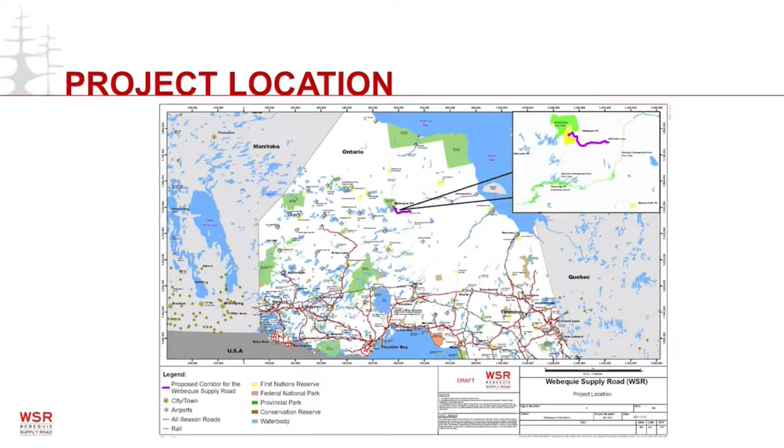In terms of the purposes for the Webequie Supply Road, I'll just go through them here. The first is to move materials, supplies, and people from the Webequie Airport to the McFaulds Lake area, which sits within the Ring of Fire mineral deposit area.

The second purpose for the Webequie Supply Road is to provide employment and economic development opportunities to Webequie community members while allowing them to both preserve and enhance their language and culture. And then finally, to provide experience and training opportunities for youth, to help encourage the pursuit of additional skills through post-secondary or post-high school education.

Let's now talk a little bit about the project itself. And as I always say, it's more than just a two-lane gravel road.

The planned road is approximately 107 kilometers in length. It would extend from, as I mentioned, Webequie Airport southeast to the McFaulds Lake area in the Ring of Fire mineral deposit area. Of those 107 kilometers that the road would travel, 17 sit within the Webequie First Nation reserve lands.

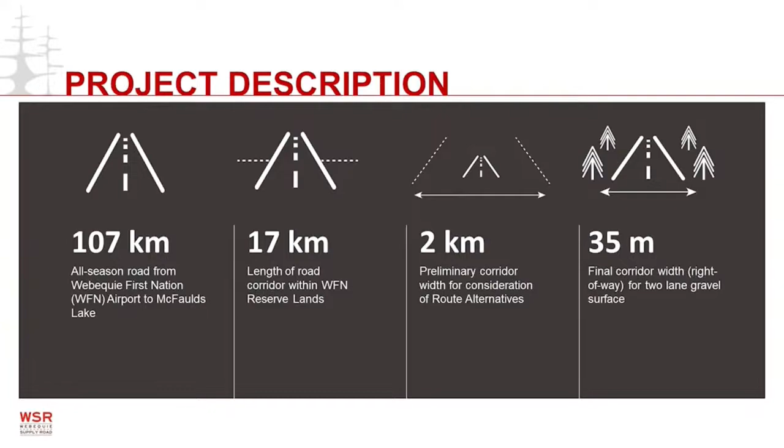That would be the right of way, the cleared area, and the road itself would be a two-lane gravel surface road.

Continuing with the project description, there are three major water body crossings. When I talk about water bodies, I talk about lakes or rivers or streams. There are many other water body crossings, 23 actually, but the three major ones require bridges. The other ones would require different types of culverts.

Again, as I mentioned, it's more than just a two-lane gravel road. The project would include both temporary and permanent aggregate pit and rock quarry areas, that would have equipment for processing or crushing the rock into various sizes depending on the purposes for construction.

And then, of course, there would need to be access roads to get to these pit and rock quarry areas, and these access roads would have water crossings included with them as well. So there is a lot of infrastructure beyond just the two-lane gravel road.

In terms of construction camps, these would be temporary, and the purpose is to accommodate construction crews and also perhaps provide permanent locations for operations and maintenance yards. And of course, these kinds of facilities would have supportive facilities such as wastewater treatment plants and drinking water storage areas as well too.

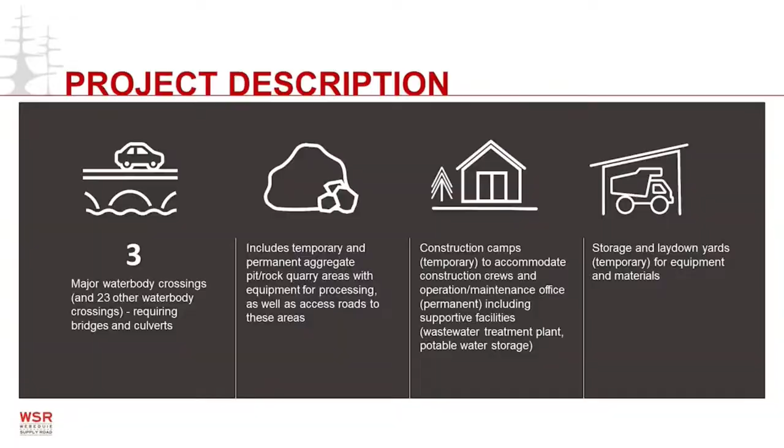And then finally, these construction camps, or the project, would include what we call temporary storage and laydown yards for equipment and materials. Typically these are, as I'll get into a little bit later on, part of the construction camps, because the workers are there and they can get their equipment and materials needed for the day without having to travel too far.

So as we move along, we're going to review the alternatives assessment process. For every undertaking or project, a reasonable range of alternatives must be considered during an environmental assessment. These alternatives include alternatives to and alternative methods.

Alternatives to the proposed undertaking are functionally different ways of approaching and dealing with a problem or opportunity. Alternative methods of carrying out the proposed undertaking are different ways of doing the same activity. Let's look at some examples to help explain this further.

When we talk about alternatives to a proposed undertaking, again, these are functionally different ways of approaching and dealing with a problem or opportunity. In the case of an all-season road, you could have different modes of transport proposed, such as a cargo hovercraft, cargo airship, or railway. You could also upgrade an existing trail system along this route to a seasonal winter road and use that to help move goods.

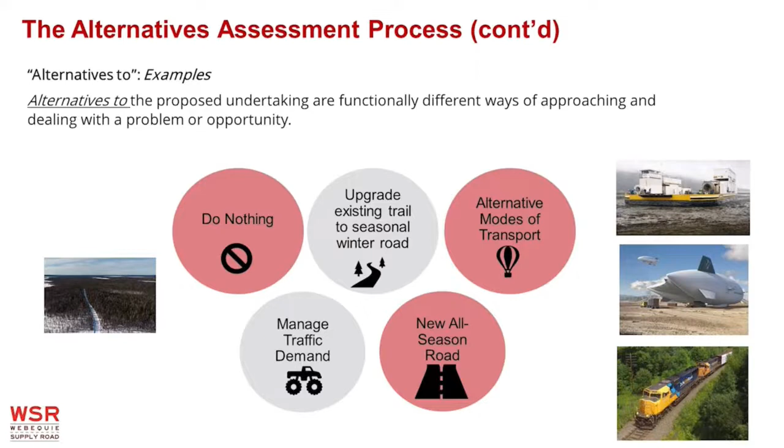Now let's talk a little bit about alternative methods. These are different ways of doing the same activity. When we're talking about an all-season road, these could be different routes. Remember, I talked earlier about a preliminary corridor having been identified that's 2 kilometers wide. Having that sort of planning area allows us to move the position of the road to adjust the route to avoid any constraints that we may not know about right now and that may be brought up as the process continues.

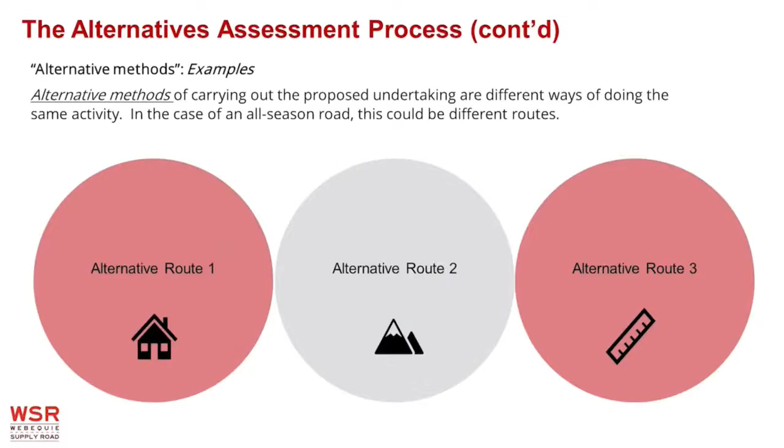So now let's get into construction camps. A construction camp may include accommodations like a bunkhouse for workers, construction offices, kitchen and dining hall, first aid station, communication system, wastewater treatment system, groundwater supply wells, waste handling and storage facility areas, electricity supply from diesel generators to provide electricity to the camp itself, above ground fuel storage tanks and refueling areas, and lay down storage areas for equipment and materials, as I mentioned earlier.

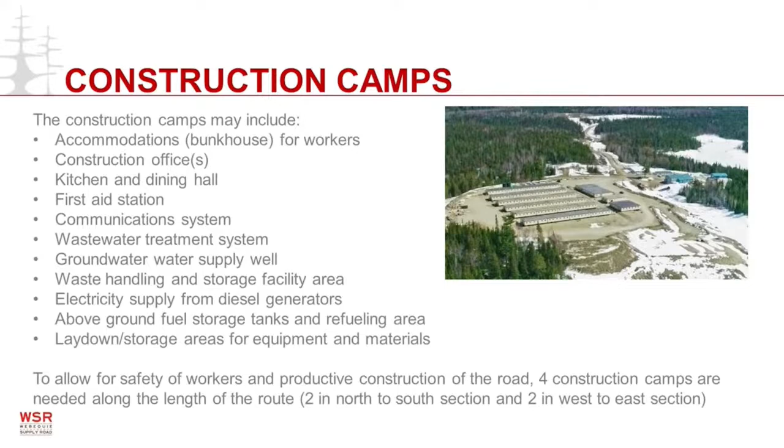So there's a lot to these camps—a lot of different infrastructure components associated with them. I wanted to also mention that there will not just be one construction camp along this route. In fact, the construction planners have identified four camps being required to allow for worker safety and to allow the project to be built efficiently. Two of these camps will be in the north-south section of the road, with two in the east-west section.

This next slide will show you the potential camp locations. You can see we have camp 1A and 1B, 2A and 2B, 3A and 3B, and 4A and 4B. Eventually, between the two options for camps 1, 2, 3, and 4, one is going to be chosen. The idea is that these would be distributed along the route to help construction be undertaken in an efficient way.

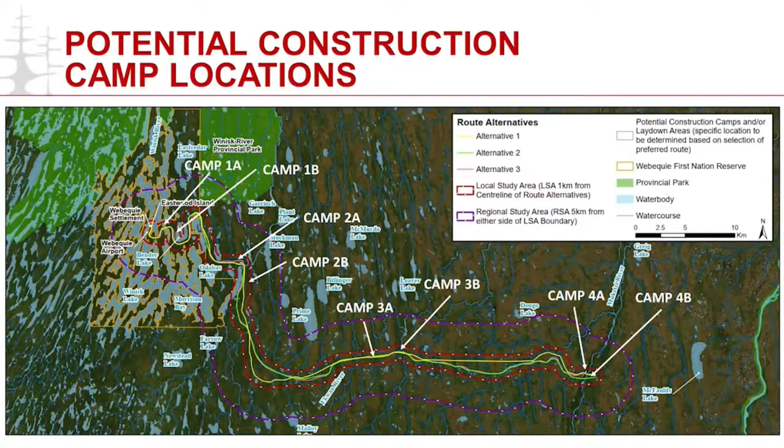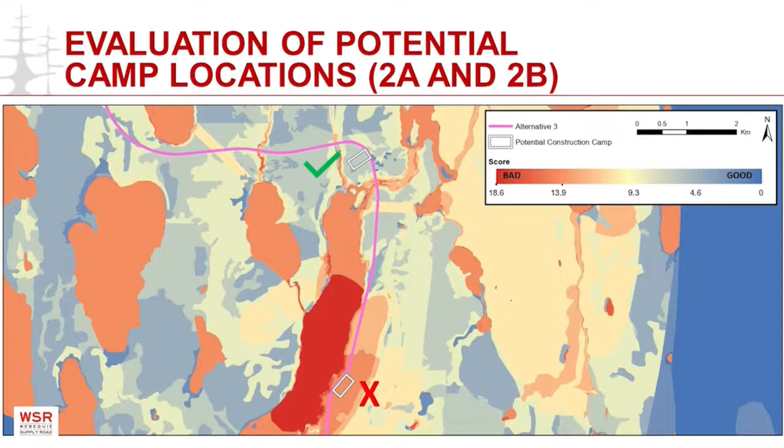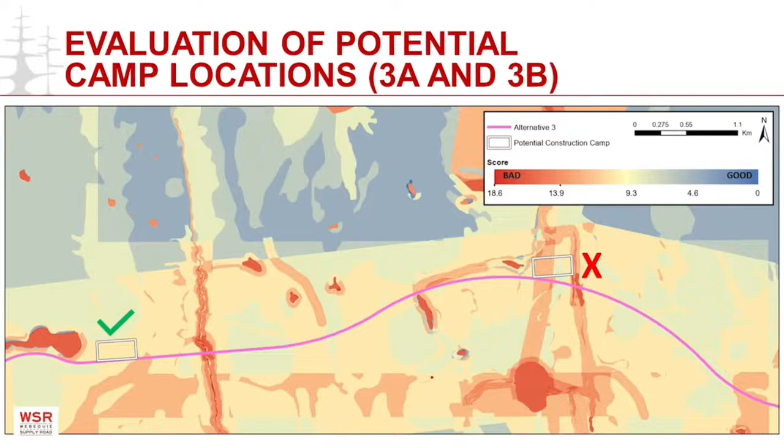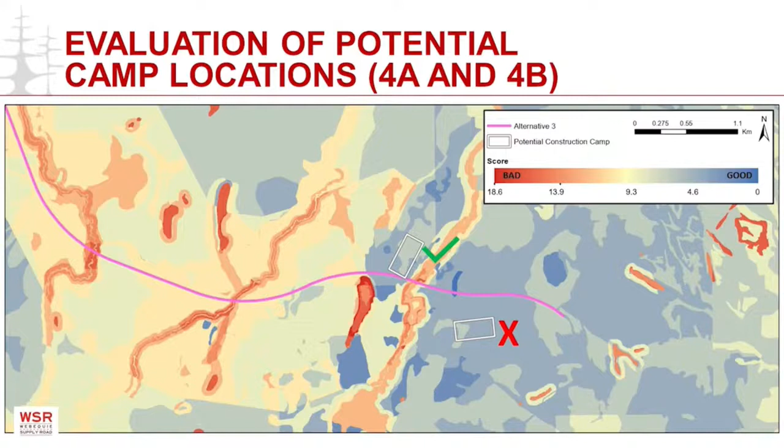It's quite an involved process to get to that point, but the good thing is it's a very thorough process that represents what community members and the general public are concerned about in terms of potential important things to them. It takes that and allows us to give a transparent, clear evaluation that we can trace back and show community members. So there's a lot of work put into figuring out where the best place is to put these different kinds of facilities, these construction camps.